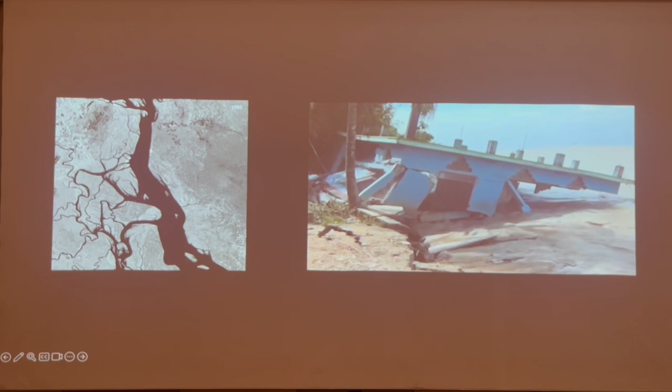Looking closely, what you see here is what happens on the land. It's fragile, soft soil because it's all sedimentation. It's bringing in the glacial melt that comes down, and with the monsoon rain, it actually washes away a lot of the land. It has taken away many villages and small towns. This is a phenomenon that is getting much more pronounced with the climate crisis as the temperature is rising.

Now why does that happen? If you see this map of the rivers, there were two major earthquakes known as the Assam earthquakes. During the Assam earthquake, the movement of the geoformation caused the Brahmaputra river to change its course, and because of the changed courses, the Ganges and the Brahmaputra met together and created this enormous force, which later created this whole system of land erosion.

Now if you go and see the sand beds that I was referring to as chars, these are the sand beds that form in the middle of the river, and these are transitory, not permanent. They can become permanent - it depends on the hydrology and hydrological system. But quite often they're there for a certain period of time. Generally people do not move there within 4 years of when they surface. But after 4 years, people start to go and populate.

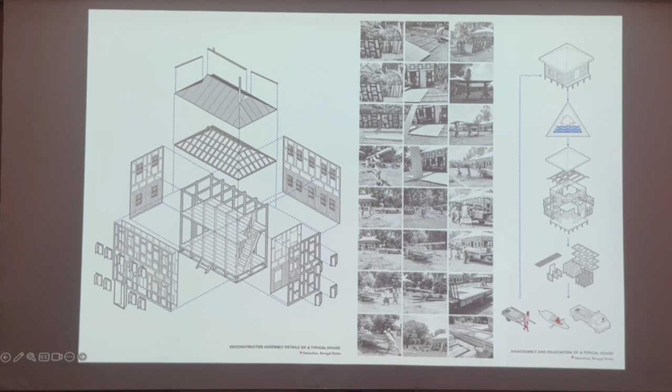While doing this research, we also saw how these people actually live in these areas. This is a vernacular house form made out of wooden frame and corrugated sheet facades. Generally, when they understand there will be riverbank erosion, they take down their houses. It's a kind of flat pack system that's been in the landscape for more than 200 years. People take their houses down, as you can see, put them on a boat or a cart or any way they can, and move to a safe location.

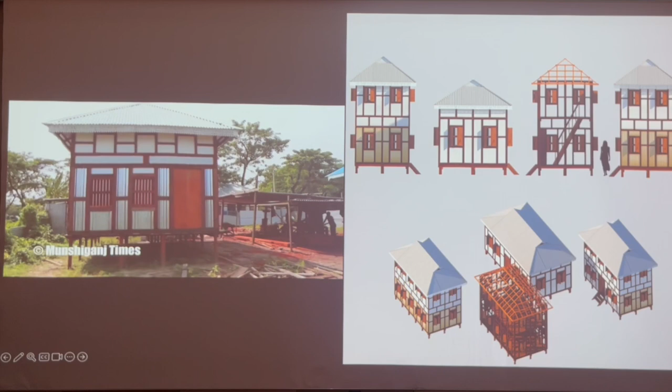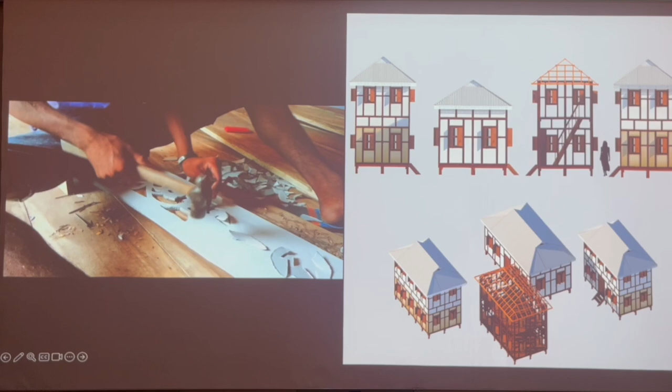And you can buy these houses in the market - we have a marketplace where you can buy houses which look like this. They could be 2-story houses or single-story houses. So even before IKEA came up with the idea of a flat pack system, we actually had it in the Bangladeshi landscape, which is kind of interesting, and they're quite beautiful also.

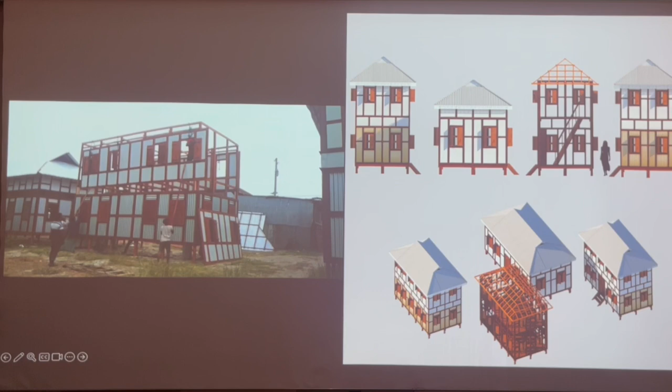We were showing our research at the Sharjah Architecture Triennial in UAE, so we bought 3 of these houses and shipped them to Sharjah, where we showcased our research. In the school where the Triennial is generally held, we were given a courtyard, and that's where we placed these 3 houses. They're beautiful houses - they're still there, the organizers acquired them from us and are using them for different purposes.

So basically, they do not invest a lot of money in the houses. During the COVID time, in 2020, when we were all sitting idle at our offices, there was not much work going on. A lot of questions came about the whole idea of this climate crisis and how people need to move from one location to another, and how our extraction-based living doesn't have enough replenishing going on.

This is a system we developed sitting in the office, no engineers involved, just a few architects. Bamboo, steel connectors, a very basic space frame structure which can be easily brought together with these steel connectors. And we have this roof, which is corrugated sheets, because it's easy to move and take with them. Bamboo grows everywhere in Bangladesh, so it's a very local material.

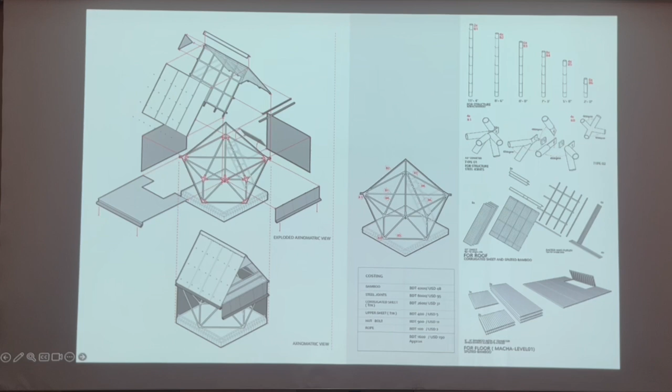Once we designed this, we made the steel connectors, and we called it Khudi Bari. Khudi means small, and Bari means house. So it's a small house idea.

MTA is my office, and Foundation for Architecture and Community Equity is a foundation we created. With the foundation and the office together, we decided that this would be an idea which is an intervention into the vernacular architecture. The idea is that it can become common knowledge for people, where they can actually build these houses. These are certain visionary ideas, I would say.

So the next idea was, let's take it to one of the locations where we were actually doing our research. So we took it to one of the sandbeds, located in the middle of the river. To go there from Dhaka, you need to take a boat to go to the mainland, and from the mainland you take a smaller boat, which takes you to this kind of sandbed.

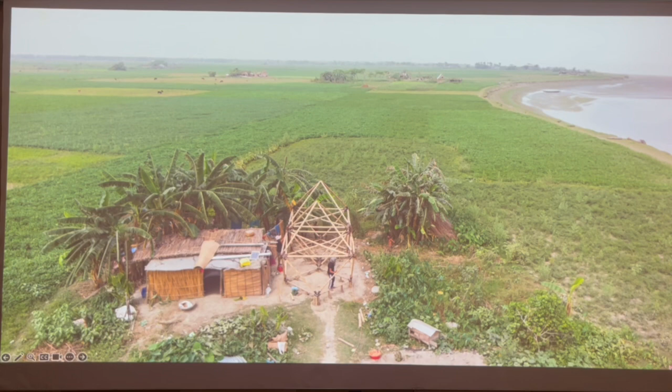And the facade that you see, I'll talk about that later. So this is another house for a bigger family, so they needed 2 modules. This is like a 2-module house.

Our team, these are all architects who act like builders, basically. They're also builders, so the team of architects, engineers, and our volunteers go and work together. This is one of those houses that is 2-module.

that they would have difficulty accepting. So the idea was it has to look very similar to the houses they are used to. But they have an upper level and a lower level, and there's tall grass that grows in that land, so generally that's what they use for their houses, taking the grass and weaving it to make a facade.

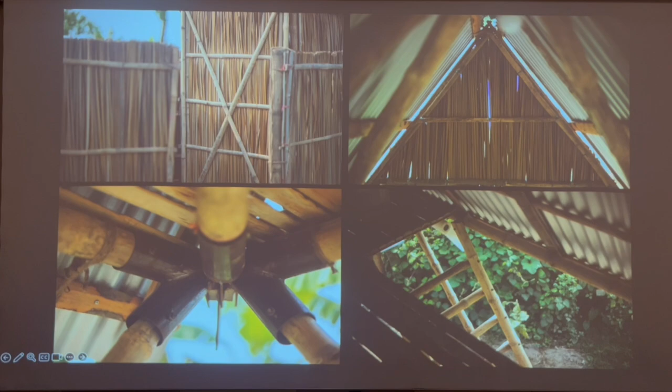So the facades could be anything, whatever they can find. It could be corrugated sheet, it could be grass, it could be jute sticks, whatever is available.

So this is the upper floor, that's the lower floor, and here's the inside of some of the houses, the way they generally live. This is without the facade in the lower level.

Once we built those and people started using them and appreciated it, we sought a grant. From the Swiss Development Cooperation, we got a grant for 100 houses. With that grant, we located 4 different locations in Bangladesh, areas which regularly get flooded or have other geographical and climatic issues.

So you see, that's the whole system. The women look at it, we have community mapping, and we do wealth ranking so we understand who is a deserving candidate. Then we have workshops where we try out models to give them an idea of what it's all about, and that's how we build it.

We also show them videos of all the other places where we've built these houses. Bringing in material is quite difficult in these sandbeds, so quite often we just bring the bamboo and the steel connectors, and the community basically works together to build these houses.

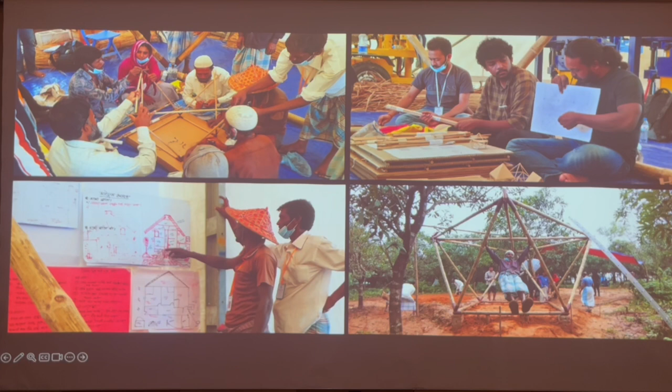So these are some of my students' works from Yale University. They went to the refugee camp and we did some projects there. One of their works - when we were working with World Food Program, based on this Khudibari idea, we built some of the projects there. Again, it's the same way of working with the community, where we showcase the different ways of building this structural system, which we call Khudibari.

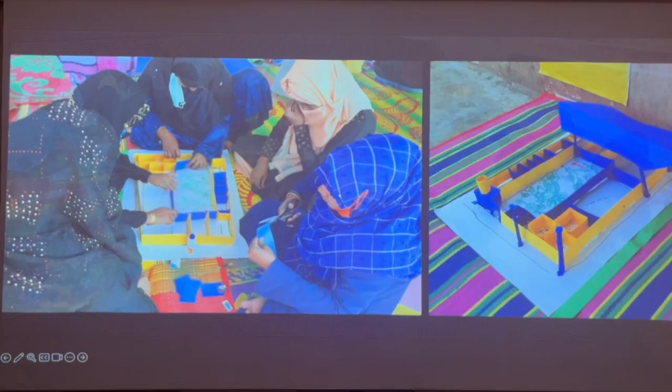This is one of our projects in the refugee camp. We were designing women-friendly spaces or women-led community spaces. It was important for us to work with the refugee community to understand what their needs are, so that we can give them the best possible solutions. The programming and the designing was developed with the community. Though we don't speak the same language, we had people who could translate it to us. So these are refugee women who made models.

They were telling us exactly where they want their rooms. If you can see, there is this nice little drawing in the middle, that's a garden. They wanted a garden - that was their only need because they live in such a dense situation. When we talked about how home was like in Rakhine State, they always talked about their gardens. So this is what their needs were, and it came out of the idea of having this community coming together and engaging with them. That's how we basically designed the structure.

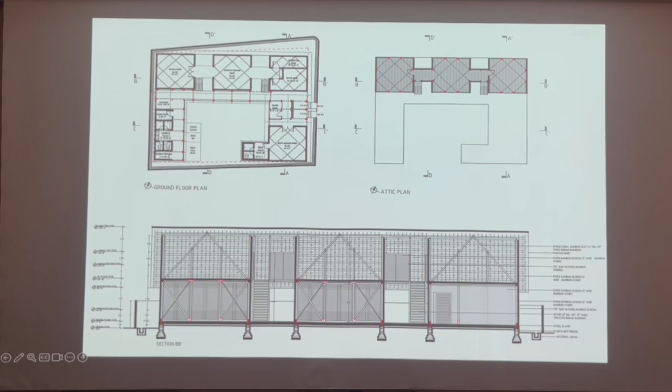So that was my work that I'm doing through the foundation, just to show you.

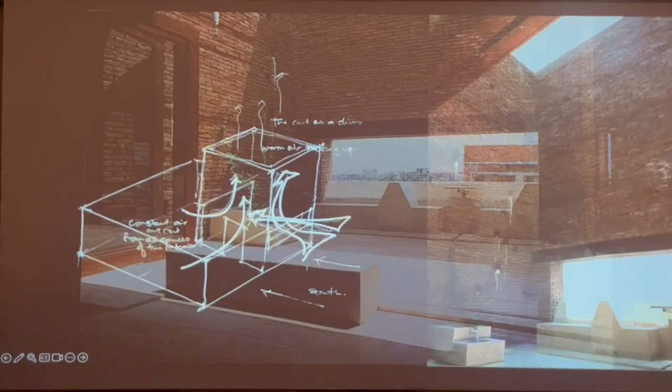The other thing we really work on is the courtyard, the idea of a courtyard or an atrium, because it allows you to create the stack effect through which you can create the circulation of air. Quite often this is something we work with. Many of our buildings always have a central courtyard, creating this airflow and draft.

One project was the embassy—the French and German embassy. The French and the Germans share an embassy in Bangladesh. It's an interesting idea.

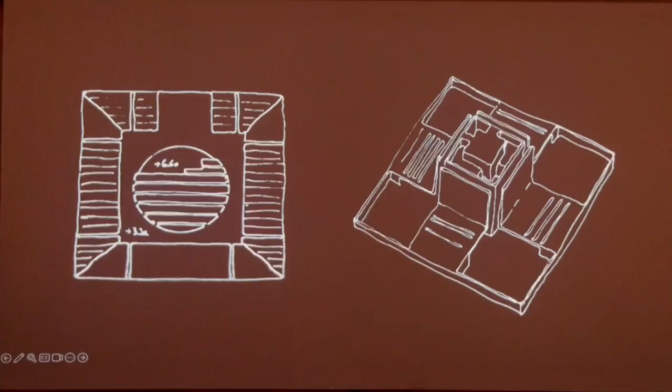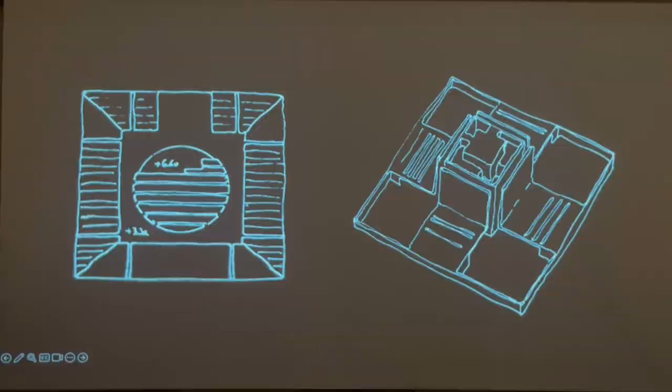It was those days when everything was very promising. Basically the French had the land and the Germans paid for the building, so it was an interesting combination. Generally embassies are designed in a way that's a very high restriction area, so they have setbacks from all sides. We were given a very small footprint on which we had to work.

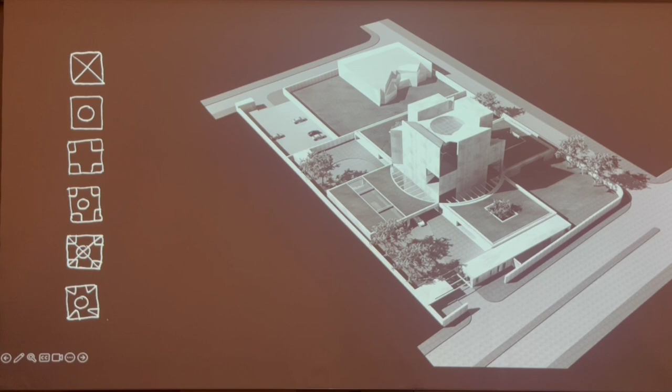I just added this project because of one person's request, so I'm just showing you this. We won the competition, but later on it was given to a French architect. We didn't get the chance to build it, but well, that's how it is.

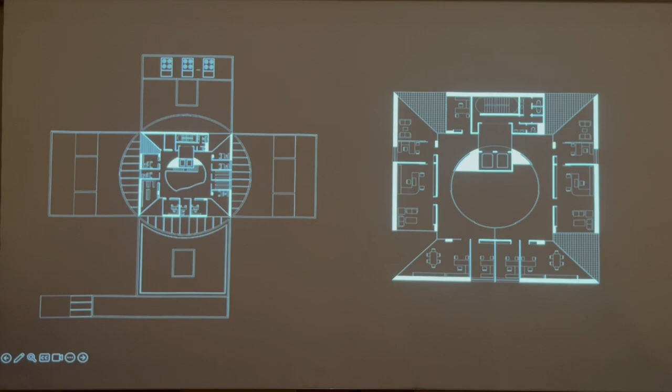So that's the central building, and the idea was to create this central atrium which could actually generate this whole airflow, with the offices on the edges. We tried to create corner cuts so that people could not look into the building from the outside, because that's also one of the requirements.

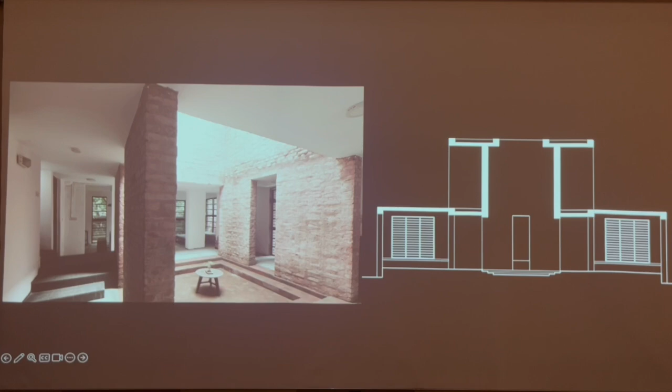Another small building which we built: central atrium, a 9 square grid plan, 4 corner courtyards. As I was saying, the breathability of a building has always been an important aspect whenever I have worked. So basically creating a central atrium to let the airflow happen, and pavilion-like spaces where people can spend more time, maybe on the roof.

Anything which needed permanence in the Delta always took earth, baked it into brick, and made structures like that. Generally, the vernacular architecture was always with mud, except for the ones that I showed you, because of the movement, they needed to build at different locations. Otherwise, all the houses are made with mud. But permanent architecture, which is about power, has always been made out of brick.

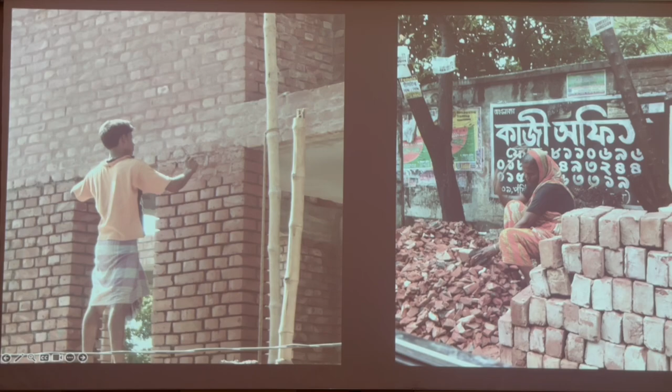We have beautiful terracotta temples, intricately carved with stories of Mahabharata and Ramayana. You can see all of that exists, and we have beautiful brick masons and craftsmen who do wonderful brick work. So if you want to source anything locally, brick is our material.

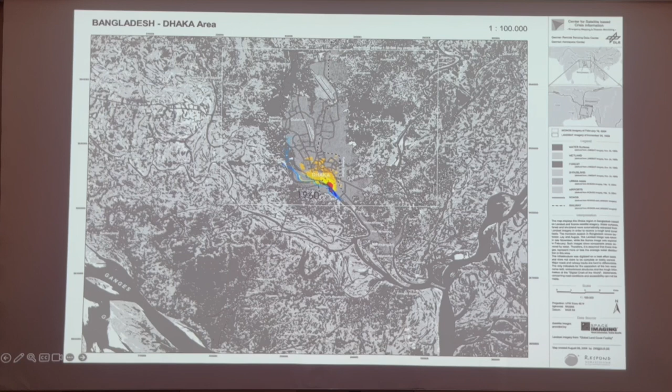The city of Dhaka, where I am based, started from the river Buriganga, and then moved to the north and now to the south. It's one of the fastest growing cities in the world, with about 20 million people living in the city. It's one of the densest cities also—the density is about 24,000 per square kilometer, which is immense.

So this is the city of Dhaka. We have these two different conditions, which you see quite often in many Asian cities—two different situations where one cannot do without the other. It's a kind of symbiotic relationship, but one is called formal, the other not; one is visible, the other invisible. So this kind of paradoxical relationship exists in the city as elsewhere.

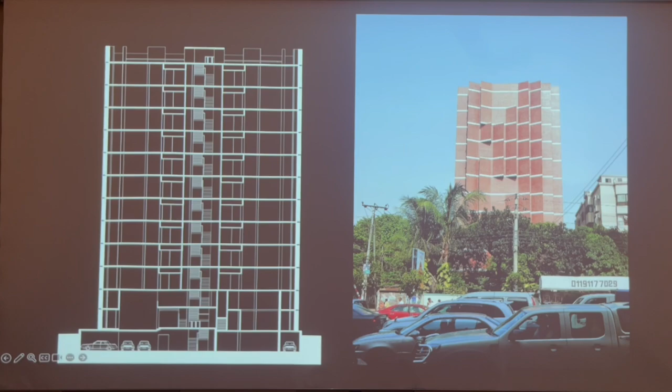One of our projects, as I was mentioning, is all about stacking floors so that we can accommodate enough people. This is one of our buildings, one of my only developer-built projects, because I do not design for developers due to the restrictions of time, effort, and the ability for an architect to produce anything good. This was one of the only such projects I have designed, and the reason was it's on a major spine of the city of Dhaka.

I wanted to create something which would give the city back a nice kind of looking into a building which is not just about the 20 families living in there, but also for the entire city. So that's the plan, as you can see—it's about bringing in the airflow from the south and taking it out through the north. This is the west facade.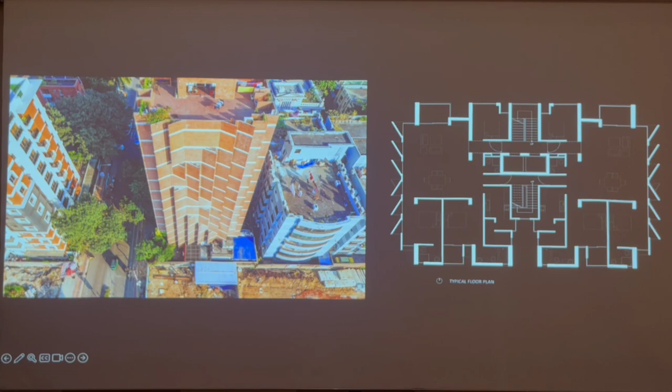And it also looks onto the street. I didn't want the street to be occupied by houses that are more or less looking into the street. We try not to give that, and make the building look north and south, because that's where the wind directions are.

Okay, very quickly—I know I am running out of time, but I hope you're not falling asleep. I just have maybe two or three more projects to show.

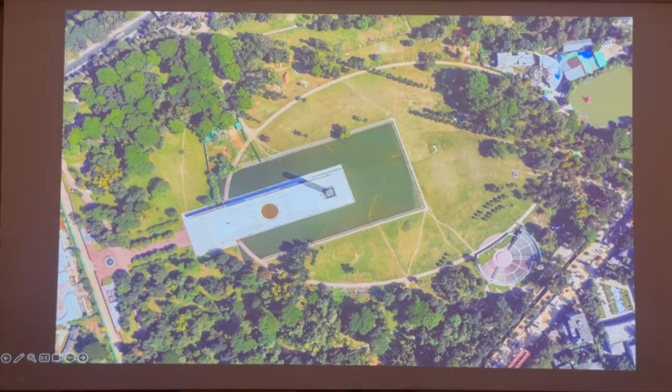So in 1997, after a very long time, the government decided to build this monument to commemorate this idea of independence, and to build a museum. So the idea was that it's not just about celebration, or just about the freedom of people, but it was also gained through a selfless sacrifice of a lot of people. So how do you bring these two dualities together? And so what we did was we created this non-building approach, where we took the museum below grade.

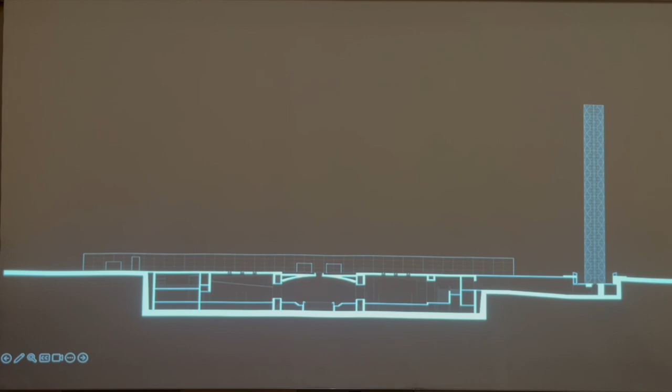If you see it here, it's much clearer. The plaza that we created is actually for celebration, and the museum underneath is about the history. Freedom, dream, aspiration generally seeks an upward direction, which is about positivity, about celebration. Sadness and loss always urges for the subterranean—you want to hold it within yourself. That's why we thought it would be nice to just take the museum below grade.

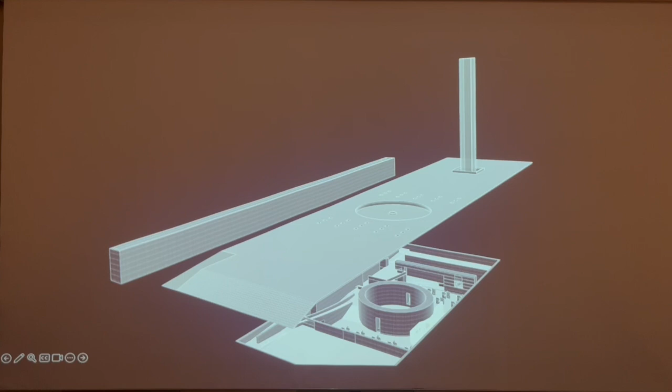It also works in the urban context because it gives you that expanse of the park that you really need. The only few things on the plaza are a water body, which is circle in the middle, the Tower of Independence, and a wall that takes you below grade to the museum. So this is what it looks like now with the tower and the plaza.

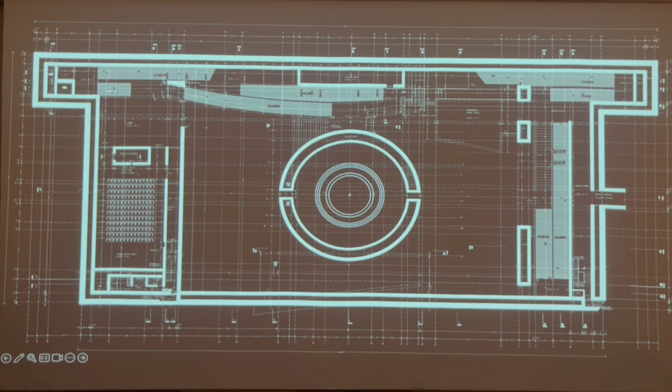You can see there's no column—the walls act as columns, and the central chamber also acts as a structural system. These are the spaces where we have different artifacts—mostly visual, printed visuals. The ramp takes you down, some daylight comes through, and then you're brought into the space, with images and documented events of the whole struggle from 1947 onwards till the 16th of December.

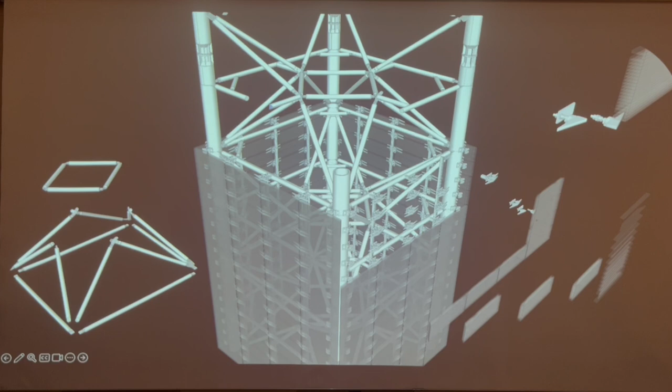The only way we thought would work was to create it with glass. We created a space with structure in the middle, and then had glass stacked one on top of the other, almost like a brick. The glasses are stacked—about 25 millimeters thick—to create this prismatic effect, which during the daytime, when the light falls through, creates a very glowing effect.

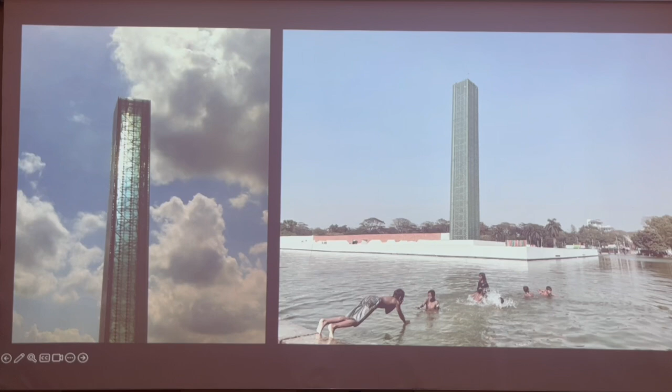That's another image where children are also playing in the reflecting pool, which is the idea we had in mind. At night, it gets lit from the outside and turns into this beacon of hope for a young nation, a nation even younger than me, if you consider me young. So that's in the evening—from the reflecting pool, you can see the light of the city and everything.

I'll show you three small projects—not really small, but three projects—which are, as I said, not in the city of Dhaka, because that's the domain of developers. So there's not much to show in the city, but I'm more on the periphery of the city, because that's where different kinds of situations are happening.

That's transformative, a place going through different kinds of transformations. And I find these places very interesting to work in.

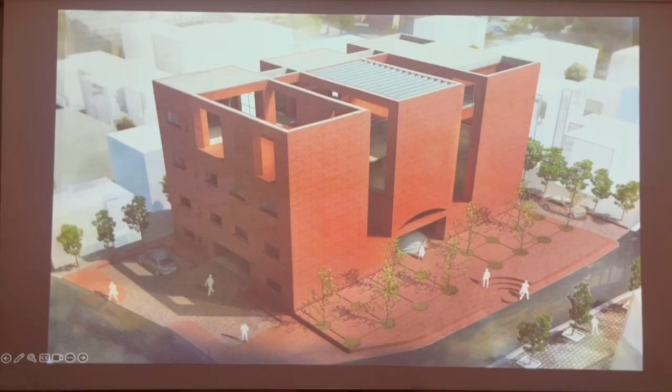So there were these images, nice renders. Maybe I have one - this is one of the renders we gave him, and they had it on their election pledge that they would make this community center. They won the election, and then there was nothing after that. They went quiet.

So we thought, okay, this is not going to get built, so forget about it. Architect's life, move on. And then all of a sudden we get this call that they have already done the foundation, we need more drawings. It was like, oh my God.

It was a really difficult time. How do you - I didn't even see the site. So I said, okay, let's go and see the site first. And so we went there, and they had these images all over, with my name underneath in big letters. It was really something.

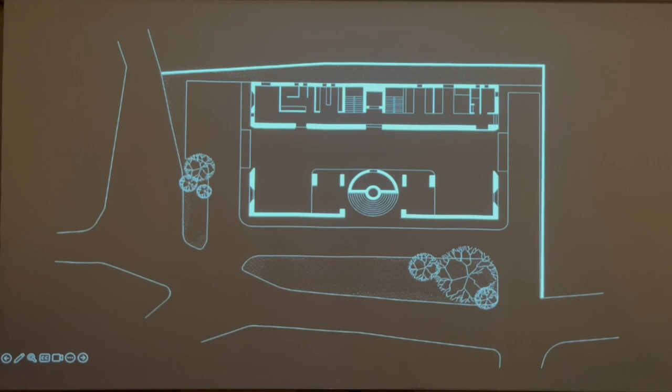So anyway, this is what finally got built - it wasn't as bad as we thought. It's a very basic building. We have the services at the back, and the ground level is more or less open space, which they use for different reasons, with an atrium in the middle. So that's the building that finally got built.

So we have an atrium in the middle, and the spaces are used for different kinds of community events - the community comes together for films, for dancing school, all kinds of activities that happen, and all the services are at the back.

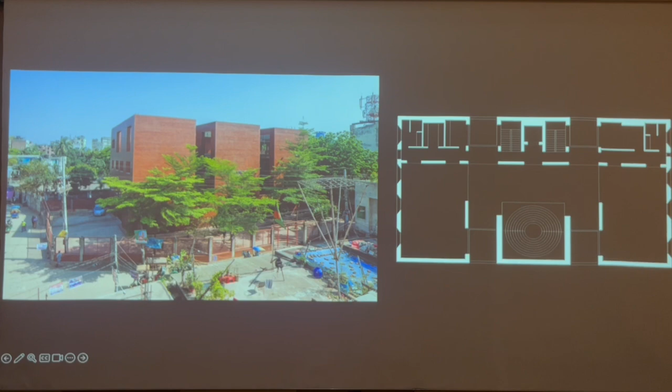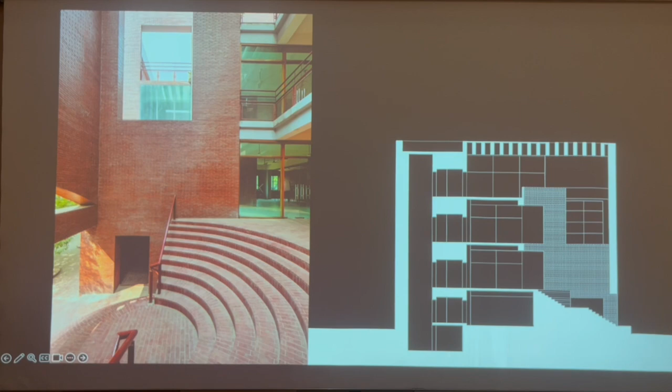That's the main atrium space in the middle where you come up, and we have this central idea that the airflow would happen through this, and the building can still be ventilated. So that's the sides - that's one of the projects outside the city of Dhaka.

These are certain things you need to encounter when working in these kinds of situations. This space is quite nice, where people generally come and gather. This stair also gets used as a sort of amphitheater for little events.

The other project, also for the same family, the same political leader, in the same area - right next to the river, they had one of the houses. These are a very politically active family; he's a minister. So the house, they had one house, and maybe I can show you if I can move the cursor rightly.

This is a house they built in the 60s. After that, within this entire plot, they forgot about the house because they moved to Dhaka. It's outside of the city, in the southern part. Here they built a cold storage for potatoes and things like that, and then they built another building, which is a garment industry.

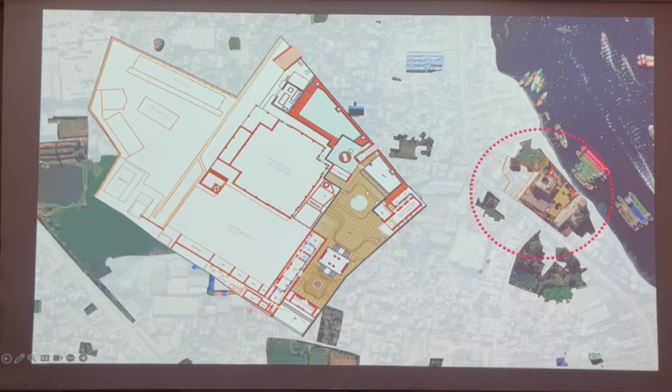At one point, this little area became a kind of residual space. This old house was actually forgotten. Later on, when the father died, they buried him here. So you can see all kinds of things happening at this site.

So there is this whole place. That's the cold storage, that's the garments factory, and on the other side of the plot there are other factories happening. So this became a residual space which had no use, and the old house was dilapidated, sort of falling apart, and with the river in front, nobody used that place anymore.

One fine morning, he came and told us that they wanted to revive this place because the father's grave is there. The other thing is that the first draft of the Bangladeshi constitution was written in that building, which was now falling apart. So now we needed to revive this little narrow residual space.

So how do you deal with this kind of space? That became one of our major concerns. So you can see that's our plan. It's a very narrow site, and the road has become much higher than the site itself.

So we needed to cascade it down so that the water could go to the river. And then the narrowness of that long tail from the road where you entered the site had to be broken down in a way so that it creates spaces.

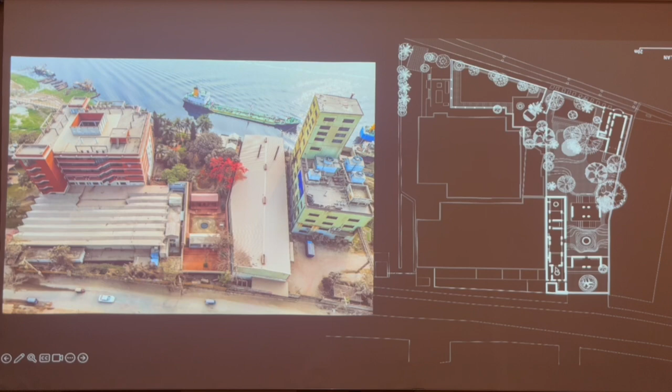We had to redo something with the old building, and we were also given another smaller building here, which is actually a storage building for the garments factory. So all of that together.

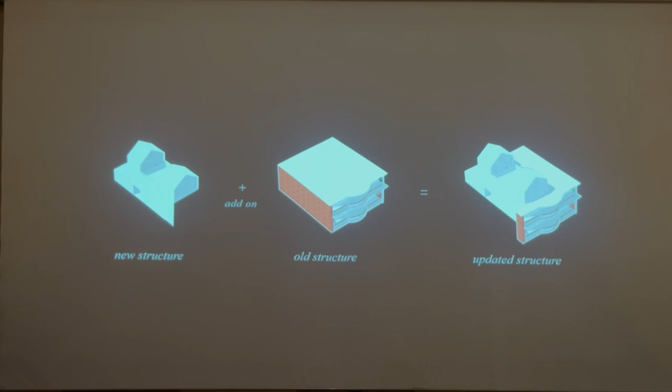What we did is, this was the older building in the middle, and it was partly falling apart, and the foundation was failing completely. So we added a kind of plug-in to the building so that we could add foundation, but at the same time hold the main structure of the building.

So after renovation, this is the building facade, which was the existing facade. We just restored the building's facade on this side. On the other side, we created this space, which has now become a kind of memorial space for the father and the Constitution of Bangladesh that was written in that space.

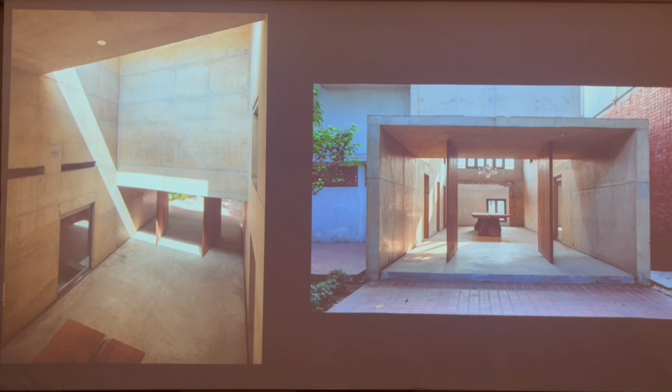So that's the light and the space that you can see. As you open it, you enter the space, and that's what it looks like. So that's one of the buildings that we tried to rework.

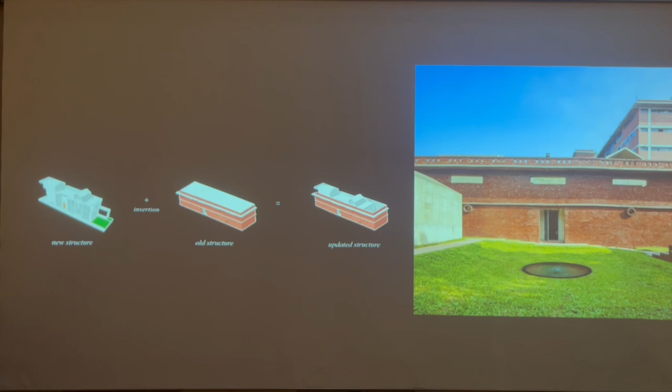The other building we were given, which was the storage space for the garments factory, we inserted another kind of building within it, keeping the outer peripheral wall, because it's a beautiful brick wall. We didn't want to tear it down. So we just inserted another volume and kept the walls as is.

Then we added a space, which became a kind of space where the family can gather. They can come in and use the spaces - we had two bedrooms and a dining and kitchen space in that area.

The long space that I was showing you, we broke it down into a few different courtyards. This is one courtyard, from the street side. We have a concrete building, kind of a pavilion, and a brick pavilion, and a central water body.

So that's the pavilion, and it broke down the entire narrowness of that space, and the water body adds a certain kind of sound. You can see the pavilion, and through that, the river. These are the pavilions, one brick and one concrete. Then from the brick pavilion, as you go in, you see the building.

And then you also go to the father's grave. So that's again the landscape, and that's the grave of the father. There's a space where they can come and stand and have a little prayer if they like.

This is a place going through a lot of transformation. It's a transitional state because the city is growing, and it used to be agricultural land, but now it's completely filled with settlements. My grandmother, who is actually the client for this project...

She basically invited me for a cup of tea. I went to her. She was sitting with her drawings and plans because she owned some land in that area. As I was telling you, my family comes from the Indian side, so when they moved to Bangladesh, they had to exchange land with Hindu families who moved to India. The Muslim families exchanged lands with the Hindu families who moved to the other side. So my grandmother's family actually had some of these lands which were exchanged in that same manner.

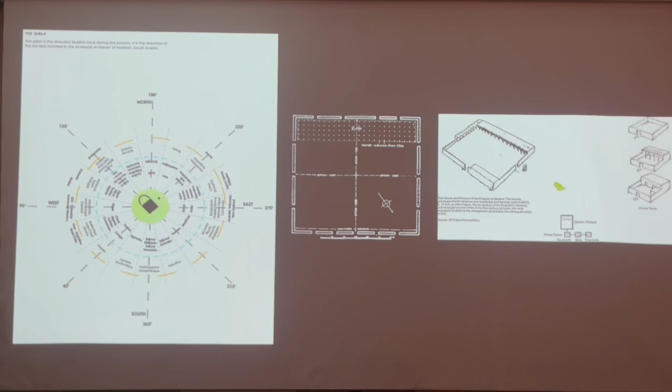That's all you need. The rest of the things now attached to mosques are actually liturgical elements that have grown over time. As Islam moved from the Arabian Peninsula towards east and towards west, you see so many different forms...

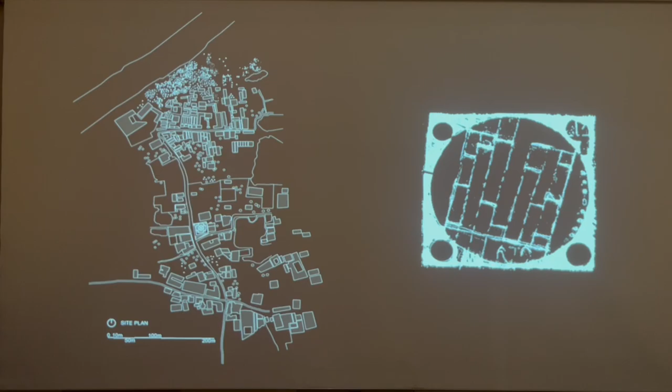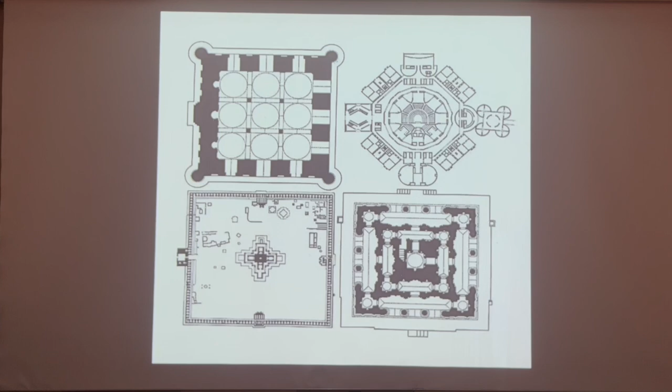So basically, keeping that in mind, looking into the site and the idea that it's a transitional situation in this whole context, I started to think how to address this. And then, of course, we have our own historical ideas of a Buddhist monastery, a Hindu temple, to a mosque form, to our parliament - all these different ideologies and ideas. And then from there, this is what I developed.

Basically, the site gives me a certain kind of a city grid, which is this square, the outer square, which is the site aligned with the road. And then for the Qibla direction, or the direction to Mecca, we needed to turn another 13 degrees, which would give you this central space, which is the prayer hall.

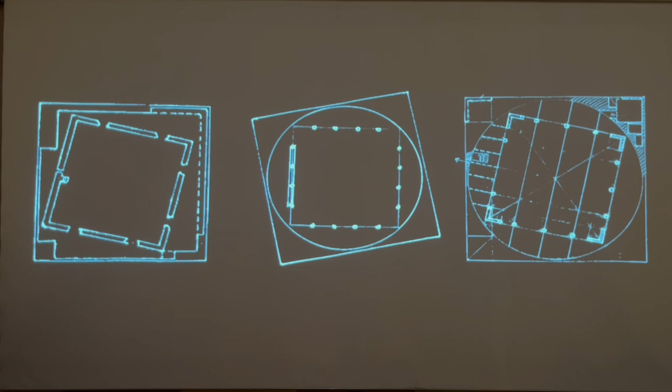And I didn't want these corners to create this kind of a difficult situation, so I added this drum in the middle, and that drum actually facilitated this movement. Whereas when you enter the main prayer hall, you don't feel that movement anymore - it kind of dilutes that whole situation.

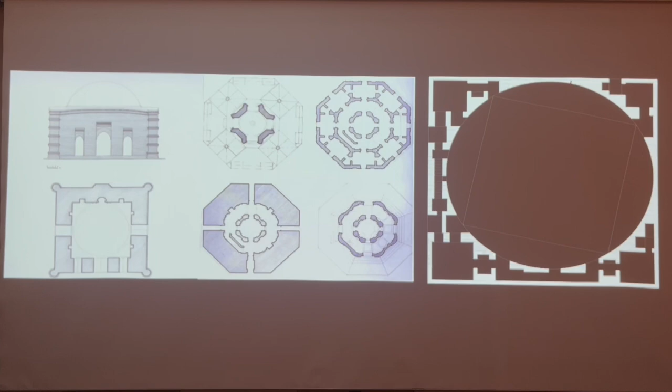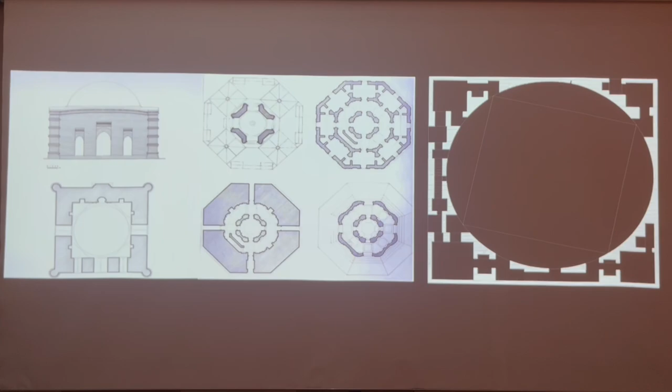So that's my initial conceptual drawing, developed through the idea of this whole architectural solidity of brick mass and load-bearing structure. That was the outer periphery, and the main mosque, or the prayer hall, is in the middle. And the corners between the circle and the square became open to sky spaces - the atrium and the idea of stack effect, the air to bring out. So all those things are still there.

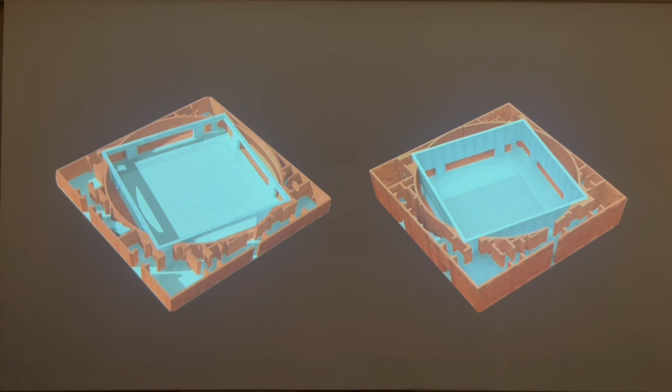As I said, I had to raise funding, so I reduced the use of concrete to only the prayer space where I didn't want any columns. So it became a very column-free span space. And the outer periphery, the wrapping of the building, became all load-bearing structure - it's all brick, as you can see here.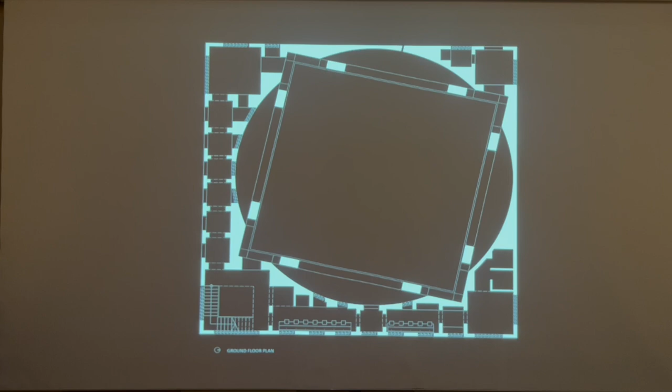The idea was that people go five times a day to pray, and you are in a different mindset when you're entering a mosque. You need a few bends to be able to concentrate into the act of praying, to go into that space. So these bends were necessary to bring people into the whole idea of coming to a prayer space.

So this is the situation - remember the image of my grandmother sitting next to a haystack - and this is what it is now. It's already a growing area where at one point you will not be able to see the mosque anymore because all these buildings are growing. So looking outside was not important anymore, it was more to look within. And that's the reason why it was important to bring in the light.

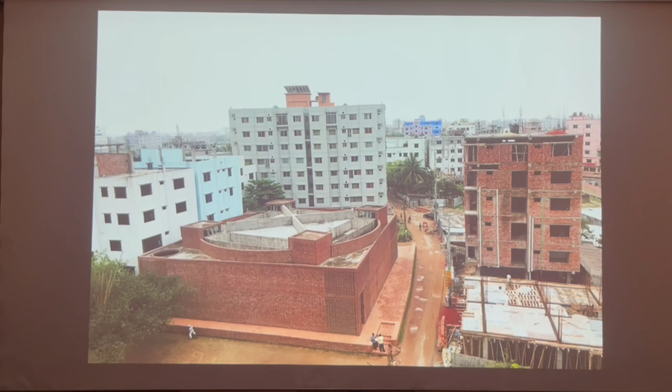As you can see, these are all buildings coming up from the city's road, and you can see that as the buildings are growing, at one point people won't even have a place to gather. So the mosque for me is also a space for people to come together - it's a kind of a refuge. It's not a space only for praying, but also for other activities, if that can be generated. That was also an idea.

That's the reason I decided not to address the symbolic aspects, the ideas of having domes and minarets. So this space is already quite vibrant, actually - generally people sit around, you can see children playing. All the plinth area is quite often very much used by the locals.

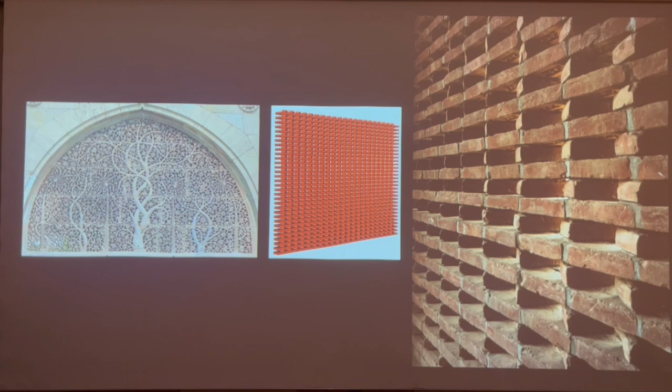That's the entry colonnade. As I was mentioning, the porosity of brick is quite often seen in many mosques with intricate mashrabiyah or jali works. That's the main prayer hall.

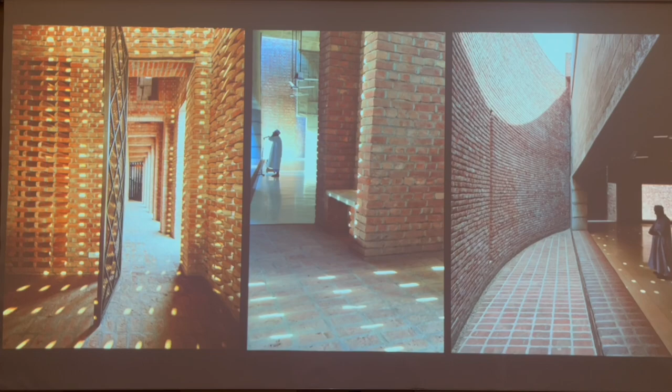That's the light coming through from the open to sky space. So that's the main prayer hall, which gets light from the sides, with the wall being washed with light. Throughout the day, this light creates a very interesting formation, creating an interesting atmosphere when you are there.

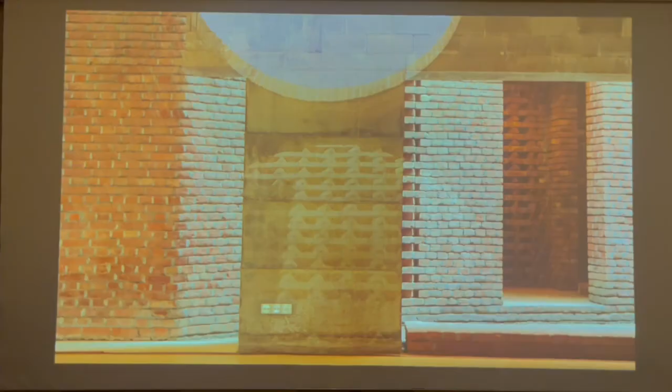These dots are there at a certain period of the year. In another period, they disappear, so no two visits would ever be the same. I've been there so many times, and none of my visits are the same. It's interesting the way the building actually works with the whole site.

Right after we won the Aga Khan Award, we had a nice lunch with the local people, and we used the mosque space to have that function. The program happened there. Last but not least, another small mosque, but I'll go very fast.

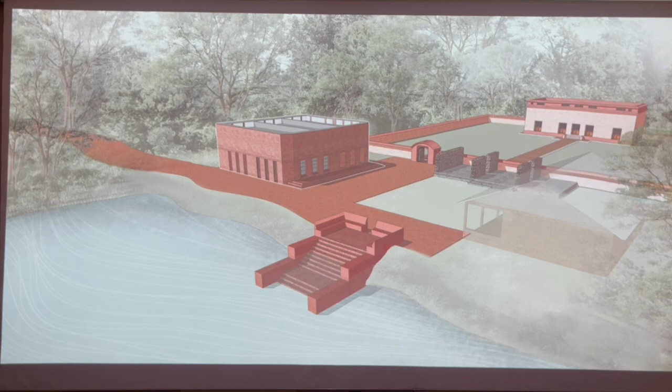That's a house that was very old, 300 to 400 years old, belonging to a family, which went into disrepair. There was a conservation architect who repaired it. Let me show you the image.

That's the building, a very small building with four rooms and a living dining space. That's the house. It was restored by one of the architects who was a restoration architect in Bangladesh, Dr. Abu Said. He asked me if I would be interested in designing a mosque right outside the house complex, which was not in very good shape.

You can see the whole house right there, with a boundary around it. Right outside the boundary, there was a little mosque. There's a water body right in front where people generally do their washing, and then they go and pray in the mosque. That mosque was in a really bad state of disrepair, so we had to redesign and rebuild it.

I took that challenge because it was a very small project. I designed this mosque in half an hour. This is the drawing, that's the mosque, and basically that's the house.

As you can see, we designed it in a nice carpet manner. You can see the pond right here, a beautiful drawing. This is the basic idea, in a village-like atmosphere. We wanted to make it a pavilion so you can see the greenery around you, and it allows air to flow into the spaces.

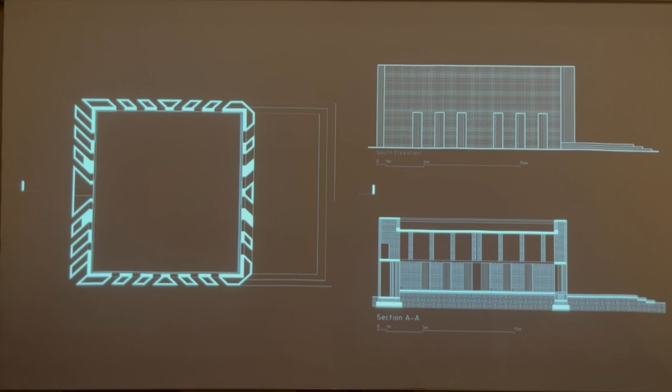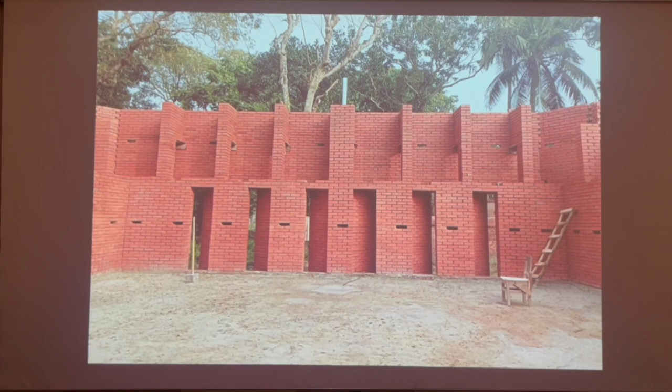This was during construction time, from within the house complex, where we have a small garden and the boundary wall. This is the project, a very tiny little mosque, with toilet facilities outside on the edge. This is the load-bearing structure during construction, all taking the load of the building.

So sorry for 99 minutes of my talk—you should all go home and sleep now. Thank you.